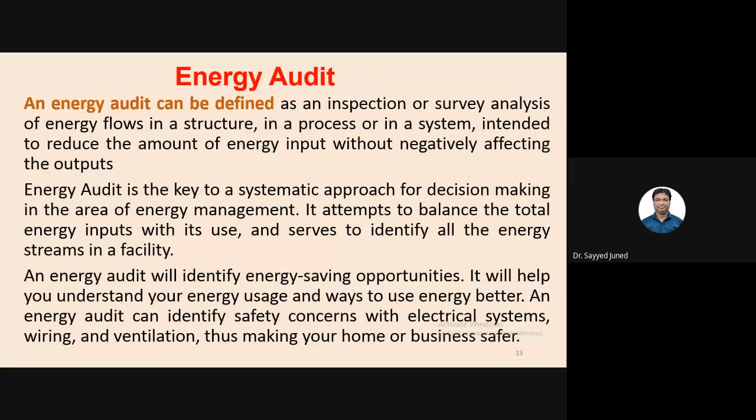For the conservation of energy, the best option is energy audit, which is a process to determine when, where, why, and how energy is used in the plant or building. It is a very essential, important question for all of us: when, where, why, and how energy is used.

This is a very important fact. We have to identify in this manner: when, where, why, and how we use energy in the building or the plants. The collection of this information helps to identify situations where there is a need to improve energy efficiency and decrease production cost.

As per the Energy Conservation Act of 2001, we identify verification, monitoring, and analysis of use of energy, including submission of technical reports containing recommendations for improving energy efficiency, with cost benefit analysis and an action plan to reduce energy.

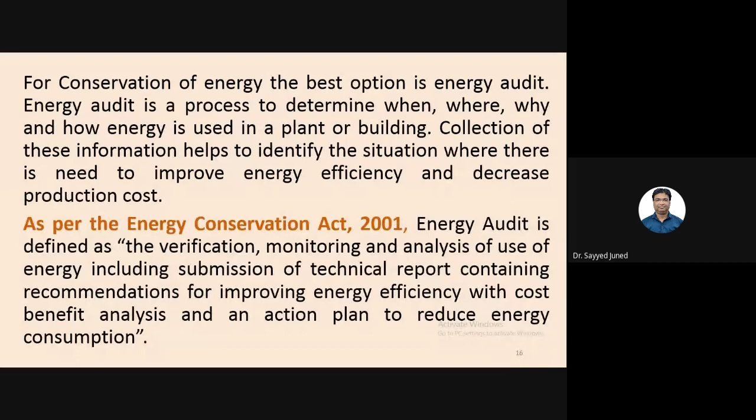Next slide, ma'am. So what is the need for the energy audit? It is a very essential need, because as we saw in the earlier slide, why, when, where, and how energy is used in this process. In identifying this, we see that in industry or any college or any operating system or plant, there are 3 top operating expenses that are often found to be energy.

That is thermal or electrical, labor, and material. If one were to relate it to the manageability of the cost or potential cost savings in each of these components, energy would invariably emerge as a top ranker, and thus energy management constitutes a strategic area for cost reduction. This energy audit will help us understand more about energy, and the way energy and fuel are used in any industry or plant.

It helps identify the areas where waste can occur and where scope for improvement exists in the energy audit. This energy audit would give a positive orientation to energy cost reduction, preventive maintenance, and quality control programs, which are vital for production and utility activity.

Such an audit program will help keep focus on variations which occur in energy cost, availability and reliability of supply of energy, deciding the appropriate energy mix, identifying energy conservation technologies, and retrofits for energy conservation equipment, etc. We are identifying this in this process.

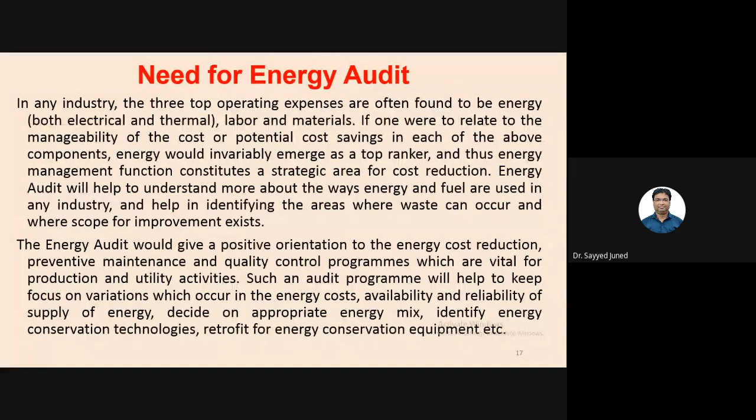Next slide, ma'am. This energy audit gives a positive orientation to energy cost reduction, and preventive maintenance as mentioned. This is important, and such an audit program will help keep focus on variation which occurs in energy cost, availability and reliability of supply of energy, deciding on the appropriate energy mix, or identifying energy conservation technology, or retrofit for energy conservation equipment in this process.

In the energy audit, the translation of conservation ideas into realities is done by lending technically feasible solutions with economic, and other organizational considerations within a specific time frame, which we have to evaluate in this process.

What is the primary objective of energy audit? It is to determine the way to reduce energy consumption per unit of product output, or to lower operating cost. This means we have to understand how to conserve and how to use energy, and how much energy we have conserved at our departmental or hall or any purpose level.

So this energy audit provides a benchmark or a reference point for managing energy in the organization, and also provides the basis for planning a more effective use of energy throughout the organization. Next slide, ma'am.

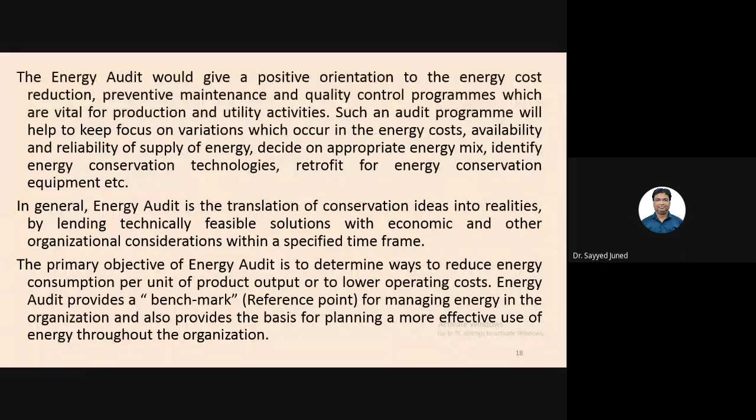So now, what are the types of energy audit? The types of energy audit to perform depend on three main factors: function and type of industry or institution, the depth to which final audit is needed, and the potential and magnitude of cost reduction desired. These are the main factors on which the type of energy audit depends.

Thus, the energy audit can be classified into two types: preliminary audit and detailed audit. Preliminary audit is like the pre-audit, and detailed audit is the audit itself.

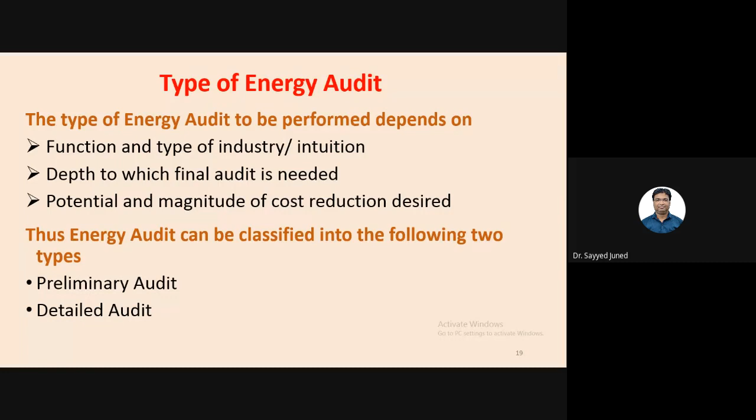So first, what is the preliminary audit method? In this method, we describe some exercises: establishing energy consumption in the organization, estimating the scope of savings, identifying the most likely and easiest areas of attention, and identifying immediate low-cost improvement savings, setting a reference point, and identifying areas for more detailed study and measurement.

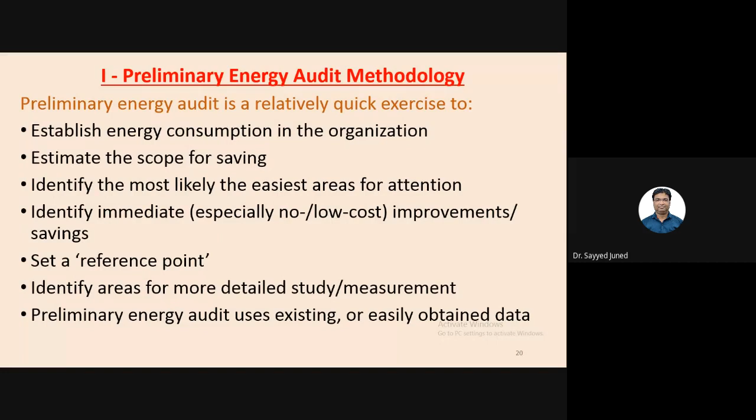Preliminary energy audit uses existing or easily obtained data. In this methodology, we have to identify these factors.

So what is the detailed energy methodology? If you see, the detailed audit has the same phases as pre-audit, audit, and post-audit, same as the green audit. In this comparative study, the audit provides a detailed energy project implementation plan for the facility, since it evaluates all major energy using systems.

In the comprehensive audit, one key element is the energy balance. This is based on the inventory of energy using systems, assumptions of the current operating conditions, and calculation of energy use in the instrument or any plant. This estimated use is then compared to utility bill charges.

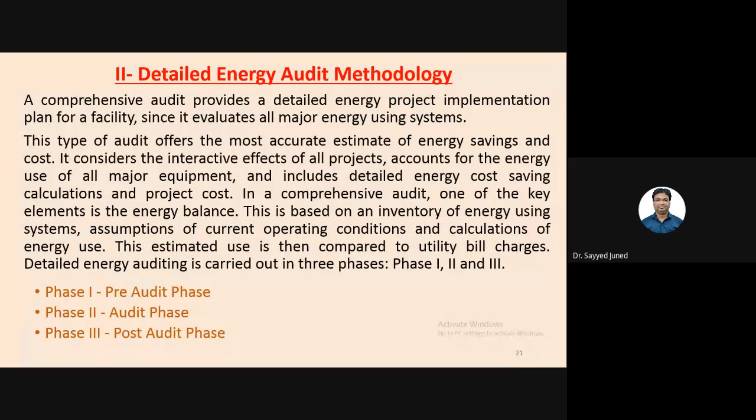Detailed energy auditing is carried out in three phases: phase 1, phase 2, phase 3, which means pre-audit, audit, and post-audit.

Next slide, ma'am. That is the guidance for conducting an energy audit. If it is a simple method, we first categorize into A, B, C.

In this category, we have to identify how many departments are present in our college, how many halls are present, how many offices are present, and for each hall, department and office, we calculate how much energy is consumed per hour, per day, per week, or per month.

If we calculate the energy by day or by hour, we can easily identify what precautions we need to take to reduce energy consumption.

So there is a comprehensive 10-step methodology for conducting an energy audit at the field level, presented below. The energy manager and energy auditor may follow these steps to start with, and add changes as per their need and industry requirements.

We first have to identify how many departments there are, and within each department, how many bulbs, tubes, fans, and other electric instruments are present, and how many times we can use them. We calculate how much energy each electric instrument consumes on an hourly or daily basis through this procedure, which the physics teacher or electronics teacher can easily identify and prepare into a report.

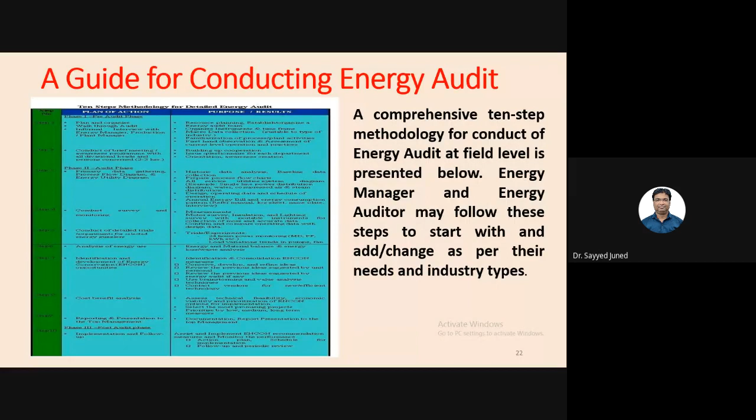So the first phase, or pre-audit phase activity: in this first phase, we have a structured methodology to carry out an energy audit, necessary for efficient working. An initial study of the site should always be carried out, as planning the procedure necessary for an audit is most important. This is the pre-audit phase report.

Initial site visit and preparation required for the audit, detailed audit. Firstly, an initial site visit may take 1 day and give the energy auditor or engineer the opportunity to meet the personnel concerned, familiarize with the site, and set the procedure necessary to carry out the energy audit. During the initial site visit, the energy auditor should carry out the following actions.

In this energy audit, we have to create a committee or body. In this body, we work with some teachers present, including physics and mathematics teachers. We have to evaluate the energy or how much watt or energy we are consuming, and mathematics teachers handle the calculation for this procedure.

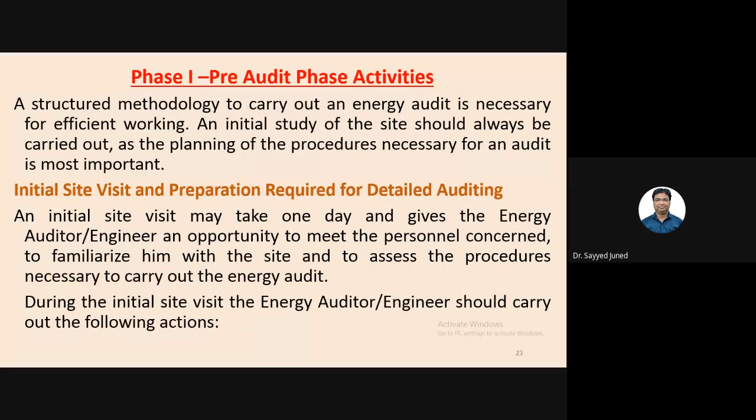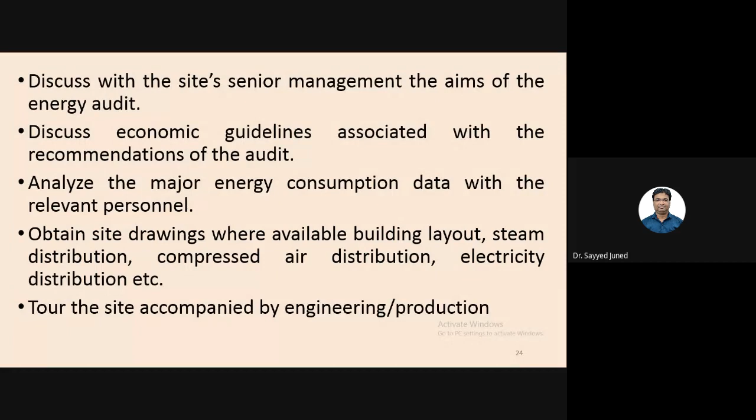The teacher will discuss the site's senior management aims of the energy audit, discuss the economic guidelines associated with the recommendations of the audit, analyze the major energy consumption data relevant personnel, obtain site drawings where available such as building layout, steam distribution, compressed air distribution, electricity distribution, etc. We are informed of this procedure, and tour the site accompanied by engineering or production staff.

These items mentioned will be calculated or evaluated in this process, and it is performed in the file pro forma or collective data. The main purpose of this site visit is to finalize the energy audit team.

Lastly, we have to prepare a team for the energy audit, same as before. In this, physics teacher, mathematics teacher, and other teachers will be involved in the evaluation of this report.

Next, to identify the main energy consumption area, plant, and items to be surveyed during the audit. Firstly, we have to identify which area is consuming energy for the audit, and identify existing instrumentation and additional material requirements, to decide whether any meters will have to be installed prior to the audit - kilowatt-hour, steam, oil, or gas meters are also required. We need to identify the instrumentation required for carrying out the audit, and to plan the time frame.

Time frame means what? We have to set a deadline. We have to evaluate and prepare the report within this period - 1 day, 2 days, 1 week, or 1 month, as is possible for your time consumption.

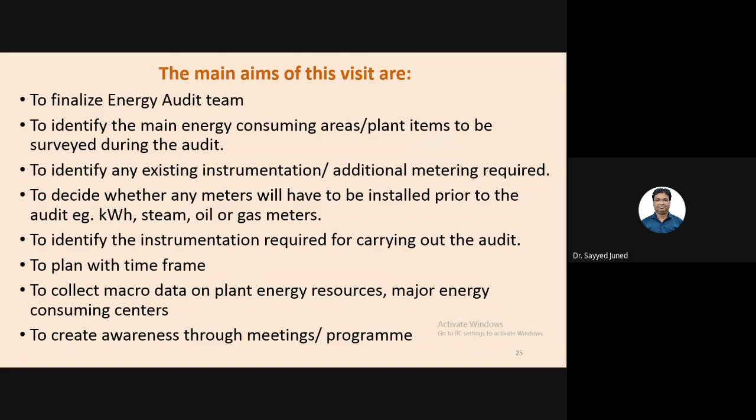So the second phase is the detailed energy audit process. In this phase, we first set the procedure or methodology, and second is the collection of data. Depending on the nature and complexity of the site, a comprehensive audit can take from several weeks to several months to complete. So this energy report or evaluation calculation is not a matter of 1 day or 1 hour.

They have to take more time, a week or a month - we may take 1 week or 1 month. Why? Because it depends on the structure of the institution and the area of the institution, and it also depends on the instrumentation of our departments. Each and every departmental instrument is evaluated for its energy consumption.

The detailed studies establish an investigation of energy and material balance for the specific plant, departments, or process equipment carried out. In this, we have to evaluate the plant departments or any equipment that carries energy - how much energy we have to identify and note it in your file.

Whenever possible, checks of plant operation are carried out over extended periods of time at night and at weekends, as well as during normal daytime working hours, to ensure that nothing is overlooked. In this we have to identify how much energy is consumed in the day period, how much in the night period, and how much during daytime working hours, for example your practical or theoretical working periods.

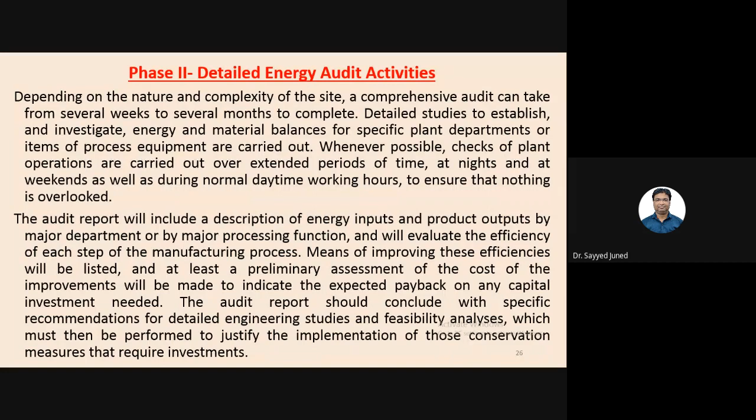The audit report should conclude with specific recommendations for detailed engineering study and feasibility analysis, which must then be performed to justify the implementation of these conservation measures that require investment, as outlined in the energy audit reports.

So the information collected during the detailed audit includes some specific points we have to work on. These points are identified as energy consumption by type of energy, by department, by major item, by process equipment, and by end-use. That is the essential way.

The next point is material balance data, meaning raw material, intermediate and final products, recycled material, use of scrap or waste product, and production by-products for reuse in other industries or plants, etc.

The next point is energy cost and tariff data. This means we have to check the energy bills, electricity bills - this electricity cost, how much it costs every month, and how much is paid to the government energy board.

For example, in one year we collect 12 bills, but we see that 6 bills are low, 3 bills are very high, and 3 bills are middle range. So we have to evaluate what is the difference between them - some bills high, some middle, some low. That is also tariff data we evaluate, and we identify what is behind this as well.

Process and material flow diagram: here we have to create a diagram or flow chart showing which department, instrument, or building has excess energy utilized. We mention this in the flow chart, and identify the lowest energy conservation in each department as well.

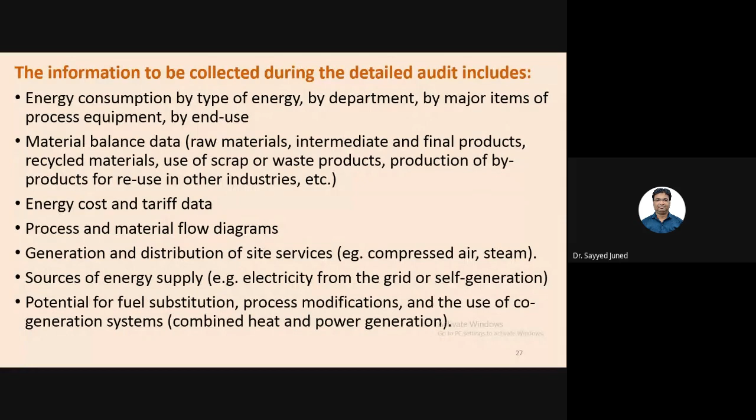The next is potential for fuel substitution, process modification, and the use of co-generation systems, meaning combined heat and power generation, which we also identify.

Next slide. The next topic is energy management procedure and the energy awareness training program within the establishment. This is an important aspect for the management's awareness of energy.

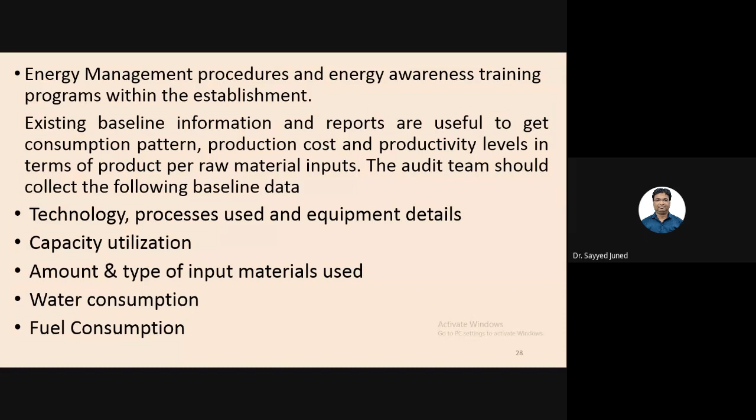Existing baseline information and reports are useful to understand consumption patterns along with production cost and productivity level in terms of product per raw material input. This means the audit team should collect the following baseline data: technology process, equipment details used, capacity utilization, amount of input material used, water consumption, and fuel consumption. This data should be identified and collected for the procedure in the audit report through the audit team.

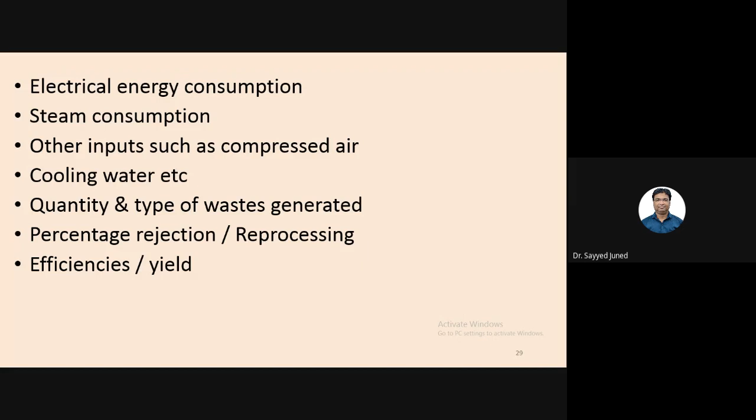So next one is electric energy consumption, steam consumption, other inputs such as compressed air, cooling water, etc., quantity and types of wastes generated, percentage rejection response, reprocessing, efficiency and yield. These points are important for creating the audit report. Next slide, that is the baseline reports.

Data collection hints. It means it is important to plan additional data gathering carefully. Here are some basic tips for avoiding wasting time and efforts.

Some measurements we are preparing in this diagram or chart. The measurement system should be easy to use and provide information to the accuracy that is needed, not the accuracy that is technically possible. So the measurement system should be easy to use in providing information for the process.

Next, measurement equipment can be inexpensive, such as measuring flow rates using a bucket and stopwatch. For expensive measurement equipment or instruments, we have to identify how much energy they consume in this procedure.

The next one is: the quality of the data must be such that correct conclusions are drawn. That means we have to grade whether production is at the normal level for the energy sources.

Next, define how frequently data collection should occur to account for process variation. So we have to collect data across different departments, halls, or buildings, to account for process variation.

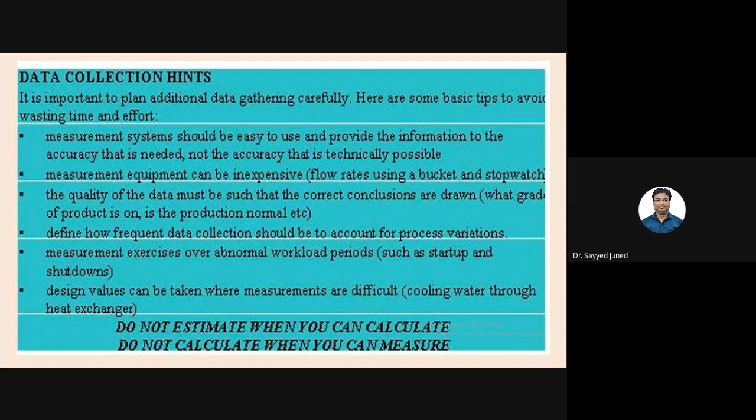Design values can be taken where measurement is difficult, such as cooling water through a heat exchanger. In some places we use cooling water for providing cooling, and in others we use heat exchangers or hot water for different procedures.

Next slide. So we draw a process flow diagram and list process steps to identify waste streams and obvious energy waste. We have to identify some key points for this energy audit: that is, overview of the unit operation, important process steps, areas of material and energy use, and sources of waste.

Generation should be gathered and represented in the flow chart as shown in the figure below. Existing drawings, records and shop floor walkthroughs will help in making this flow chart. Simultaneously, the team should identify the various input or output streams as each process is described.

For example, a flow chart of penicillin G manufacturing is given in figure 3.1 below. Note that waste streams, meaning mycelium, and obvious energy waste such as condensate drained, and steam leakages have been identified in the flow chart.

That means the audit focus depends on several issues like consumption of input resources, energy efficiency, and the potential impact of process steps on the entire process of identifying waste generation or waste creation. This process also involves energy consumption. In the above process, this is important for unit operations such as the germinator, pre-fermentor, fermenter, and extraction, for this identification.

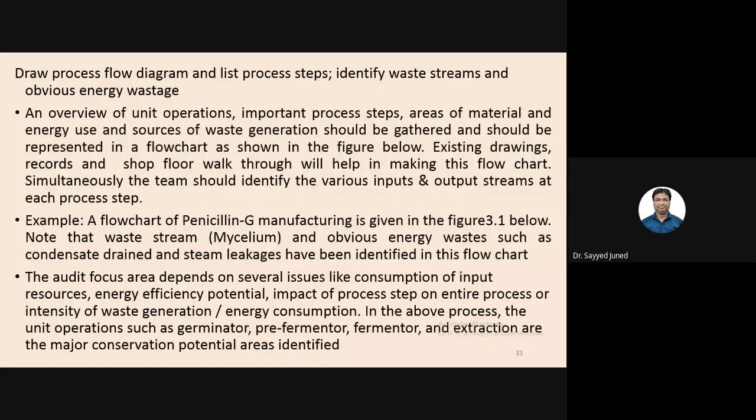So this is the penicillin G diagram on your screen. We see the procedure: extraction, filter press, non-filtered broth tank, fermentation, pre-fermentor, and germinator. The wastewater treatment plant is also used in this process. Raw material and energy are created in this procedure, for identification of the process.

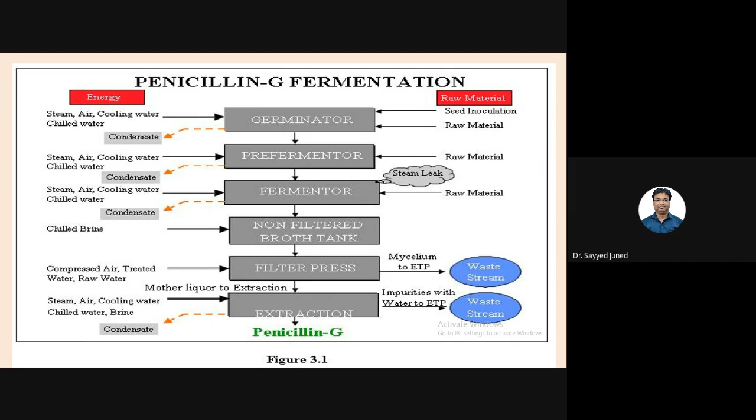Next slide. So what is identification of energy conservation opportunity? How much energy consumption can we conserve through opportunities such as fuel substitution, energy generation, energy distribution, and energy used by process? This process we have to identify.

In fuel substitution, we have appropriate fuel for efficient energy conversion. In energy generation, identify efficiency opportunities in energy conversion equipment and utilities such as captive power generation, steam generation, boiler, thermic fluid heating, optimization. These are the engineering instruments or processes involved in this.

Energy distribution: here we distribute chilled water, cool water, hot water, or any improved electrical system. Energy used by process: this is an opportunity for improvement, and many hidden processes. Process analysis is a useful tool we can use for process integration measures.

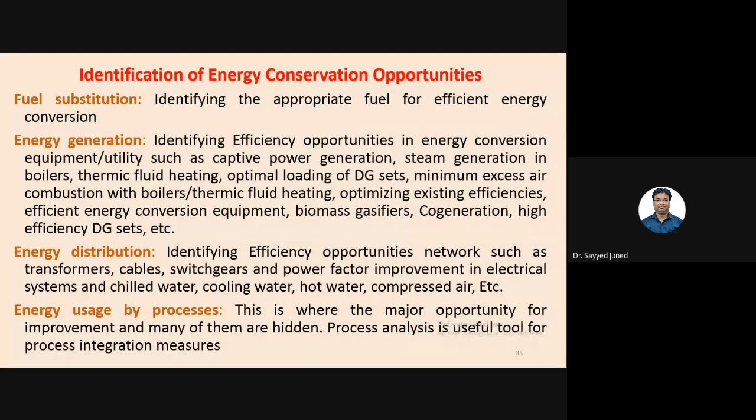Next slide. What is technical and economic feasibility? Technical feasibility should address some issues such as availability, space, skill, manpower, reliability, service, etc.

It impacts the energy efficiency measure on safety, quality, production and process, also equipment. Maintenance requirements and spare availability, as well as economic viability, often become key parameters for management acceptance. The economic analysis can be conducted using a variety of methods: the payback method, internal rate of return method, net present value method, etc. It is easy to work out a simple sheet assessing economic feasibility to provide these things.

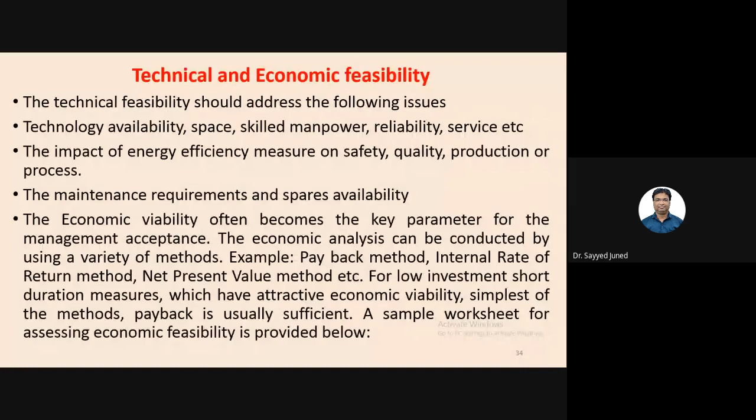So classification of energy conservation measures: there are three types, low cost high return, medium cost medium return, high cost high return. This procedure, these three energy categories, are based on the potential of identification. Normally low cost, higher return projects receive the priority, while other projects have to be analyzed and engineered with a budget for implementation in a phased manner. That is the guideline for creating the flow chart or calculation of this report in the low cost, medium cost and high cost categories. Next slide.

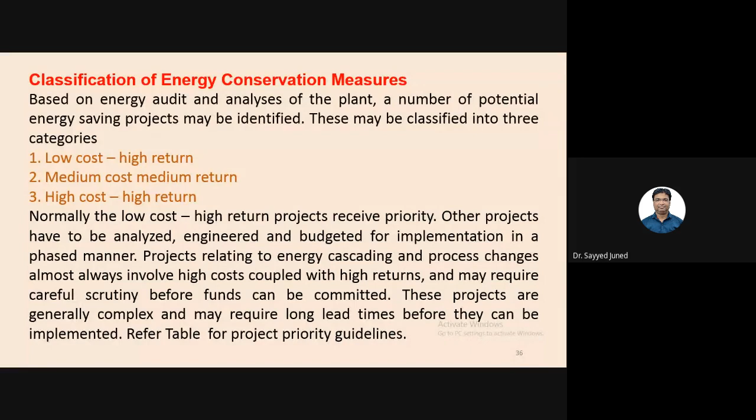So role of energy and energy audit in higher education. My dear friends, if we see higher education, the education institution has a responsibility in relation to the society in which it operates. Environmental impact has become a critical part of measuring overall performance and the ability to continue operating effectively. This is part of reflecting the growing recognition of the need to minimize operating costs that include utility and energy consumption through identification. If we see behind the role, the rise of awareness and sustainability of energy among the leaders of tomorrow, responsible utilization of energy resources will exemplify a commitment to promote sustainable energy in this process for higher education.